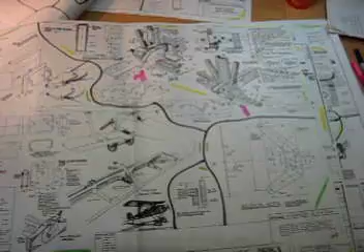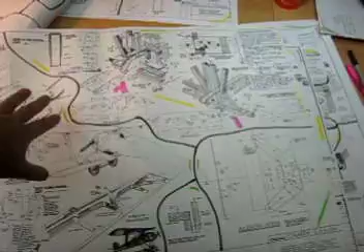In a small way, I've decided to put some marks on the plan so I can find myself a bit better whenever I'm looking for some info on something. So first, I've separated everything in areas with those big black marker lines.

So whenever I'm working on the fuselage, let's say, and then we have yellow as in other videos, so yellow is fuse, green is wings. So now I know that at least I don't need to bother about all this section here and all here because it's all wing stuff. I only need to worry about this thing.

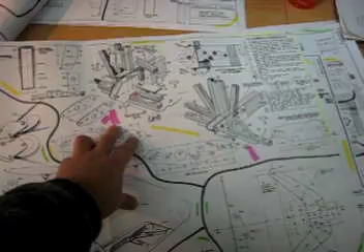I've also started doing this, which is, these are just the numbers of the plans for what I call the carry-throughs in this case. So carry-throughs are talked about on all of these plans. See here, there's detail about the carry-through. So I've got all the numbers of the carry-through.

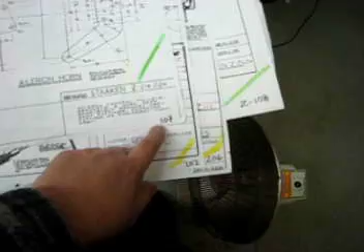I've also put big numbers on every corner of the plans so I can find them easier, because you keep going back and forth from one to another.

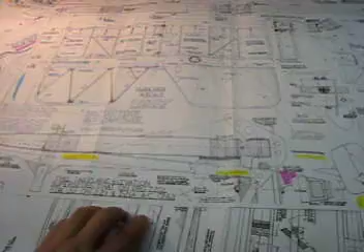Another small, very good example to prove that this is really efficient, I think, is that this is a plan that tells about tailplane elevator, and there's just a small detail here. This is yellow; the blue is for the tail sections, so the yellow is for the fuse. So again, near the information, I've got everything that relates to it.

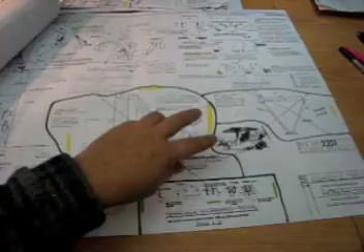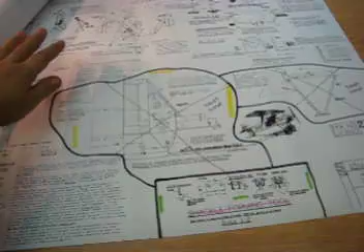This is to show another advantage of putting them in boxes, so they're separated. So now here we have some details if you want to shorten the nose for a bigger engine. So first, they're separated from all the engine installment stuff, so I know they're not important once I'm in installment mode. And there's also a small box here for a tool, very important.

And the two boxes here for the shortened nose are of no importance for me, so I've actually crossed them out. So visually, to me, it's great because it's some information that I don't need to bother with.

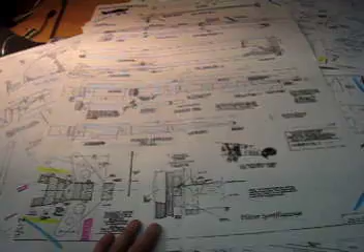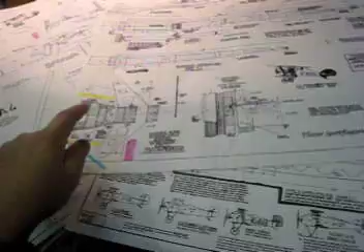It's a great example. This is rudder ribs and fin ribs, and in the corner there's a small detail about the fuse, which we see in yellow, and rear fuse, which is what I call the area near the back of the fuselage, and then all the plans that relate to that have details about this. So I'm just thinking that I could have been doing the rear fuse and missing this guy. Same for this guy also, same thing.

This has to do with the tailplane mainly, and then there's this, we see a small box with again rear fuse. Also I have small marks on each side of the plan, on the plans that have the most information. So this one, 201, is the one that has the most info. The other ones are more like details.